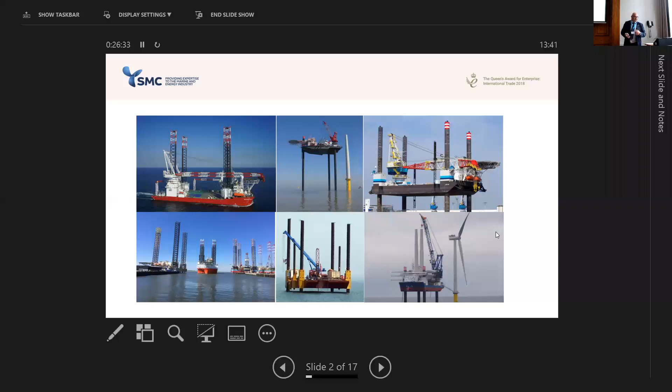So the way the presentation is laid out, the supplement question is asked at the top. And then what we're doing is basically giving a range of answers and a range of questions that you may or may not ask or think about when you're doing a vessel. So for those of you who've never done a jack-up vessel and might have aspirations of wanting to get into that market through supervision and increasing your capabilities, this might be useful. For those of you who've got accreditation, you'll probably tell me I'm wrong at the end, but okay.

Right, okay, so first question, and they are laid out in the same order as what there is in the supplement, so yeah, off we go. So is a vessel operating within a specific trading area or limiting distance from a safe haven as prescribed by the flag state? So what are we looking for there? In essence, we're looking at certification. Okay, it's realistically, it's a fairly standard question.

One question about, which I'm going to throw out to you is, what is a CMID or an MWS? What type of inspection is it? It's an audit. Yeah, it's an IMCA, yeah. It's a snapshot. Safety. You're all right in one way, but you're all wrong in another. Is it a pre-hire? Is it suitability? Could that question be deemed as a type of suitability question?

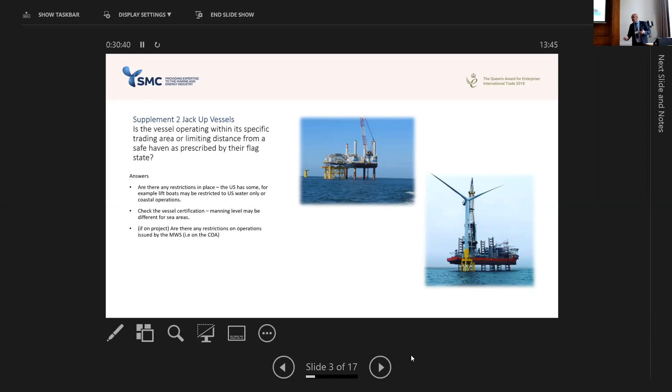So, MODU, okay? Can a vessel be two different types of entity? Simple answer is with a jackup vessel, yes it can. Because most jackup vessels will have a vessel certificate to say that it is a, if I use an example of say the Seajacks Zaratan, Scylla, any of the self-propelled, they will be a standard vessel. But then they can also be a MODU.

So when they change from being a vessel to a MODU, do they need a vessel master? Technically, on some of the vessels, no, they don't. They can actually de-man down to something like a crew of about 4 under the minimum safe manning, as opposed to when they drop back into the water, they may need a crew of 20. So again, it's when is a vessel not a vessel? And that's realistically, when is it a MODU, when is it not a MODU?

But again, the question is asking, does the vessel have a MODU certificate? So again, it's a simple yes or no. But what you're looking at is the criteria behind it, and is there anything there that needs to be addressed, needs to be picked up on? Have a good look at the certificate. Again, looking at any restrictions that it might have. There will be listings of restrictions which reflect on safety, and that can come back to, again, what its survival heights are. Survival heights can be determined depending on different sea areas, different projects.

I know I've got a couple of marine warranty surveyors in the room here. So if I'm correct, Lisa,

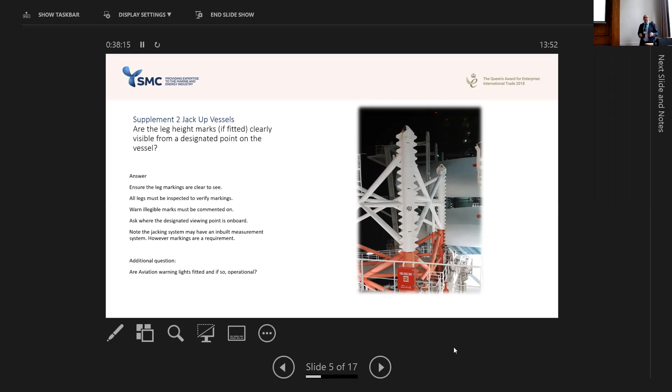The other thing as well with jack-ups which have particularly long legs, you're also looking for aviation lights as well. That can come into the additional supplement section. If one, and you ask them to put the aviation lights on, there's one not working, that would be something you would put into point 14 of this supplement, which would be an additional finding to it.

Okay, this is a bit of an odd question, and fortunately in our office I have a very good guy who was master of a jack-up for 5 years, one of the big ones, and he always said when he was asked this question, it's slightly odd because it's more based around some of the older types of jack-ups to what they used to have with inclinometers and things.

So how the calibration certificates and that are done, it may be one that you come across if you were doing it that you get as an observation finding, and it has to be given more investigation by the vessel operator. Because what a lot of the vessels have, they have calibrated systems which are digitally calibrated within the actual jacking control components, rather than just on an actual inclinometer, which is in place on how that is calibrated. Because are they calibrated?

They probably were calibrated at day one, but are they regularly calibrated? From his own experience, he said no. Basically, they've probably moved around the ship as well. So it's not a trick question, because there are no trick questions within the CMID. It's one you may not find a simple answer to, so it may create an observation that's later rejected by the vessel operator or master depending on how it's explained.

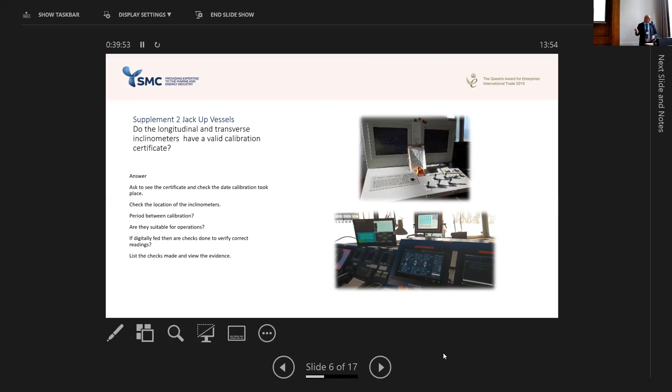Next question: have jacking engineers received formal training in jackup operations, including fundamentals of jackups of soil conditions? Anybody been on a jacking engineers course? Nope. Anybody heard of a jacking engineers course? Yep. Okay, may I ask where the course was or who it was run by? Julian Osborne. Which company? Oh, okay, an in-house course.

Jackup courses, there are not many. LOC have run one kind of traditionally for quite some years, but there aren't many because there are so many different jacking systems, and a lot of them may only be on one or two types of vessels. So really the question becomes, have you had training on this specific system, and what level of training? A lot of it may be in-house training, or training from the actual jackup manufacturer, the systems manufacturer, and then it's how you interpret the soil conditions.

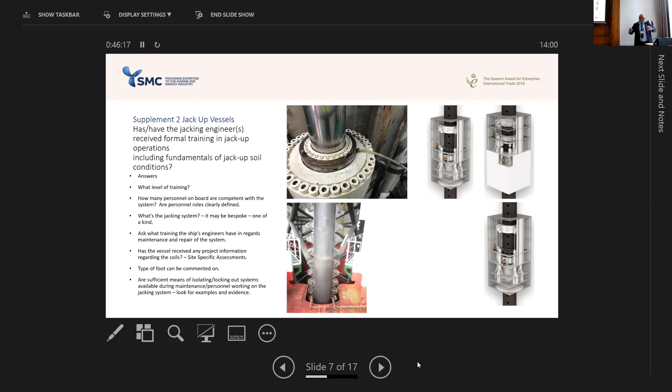Is everybody getting quite hot in here? Have we got some windows open? I don't want people doing an Angela Merkel on us and starting shaking. Just to show I'm current, that's all. If anybody didn't follow that, Angela Merkel nearly passed out yesterday because of dehydration at some event she was at. She was stood shaking, so I didn't want to see anybody starting to do that. Okay.

So, next question: does the vessel's operating manual cover generic procedures for refloating, towing, self-propulsion, dynamic positioning, preloading, elevated operations applicable to routine operations of a jackup?

Right, big question. Procedures manual - that's what we're looking into. When you go to do an inspection, how many times have you been given a big box of manuals and told to go read it yourself?

I don't need to know how it works because I'm not going to use it. What I want to know is, do the crew know how it works? So when they give me the manual, I normally give it back and say, you tell me. Then I can take the manual and reference back to see if what they're telling me is what they're actually doing. So it's question, answer, listen to what they're telling you, then cross-reference to what is written.

That's what this question is basically all about - understanding that the crew understand what the procedures are. There's quite a range of things there, and for those of you who do DP, most modern vessels have DP, and what they go through is a changeover.

So you go from being pinned, legs down on the seabed, to floating. You go through a stage when jacking down where it gets a bit bumpy because the hull is still in the water and having an uplift effect. That stage is quite critical and very weather critical, because a lot of vessels can't operate much more than about 2 meters HS.

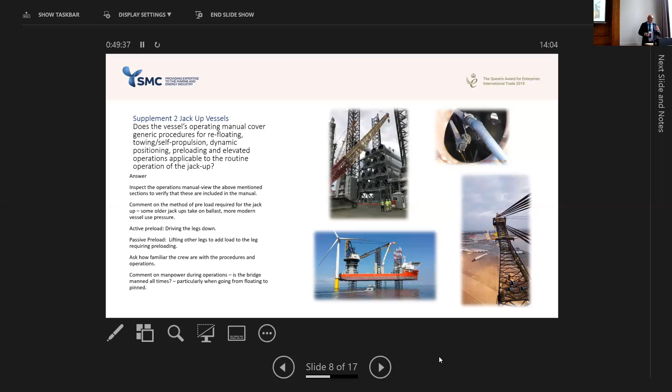So weather does become an issue over that, and that goes through the preload side as well. So it's about getting that information out of the crew, making sure they understand what they're talking about. It really is a listening question - again, cross-referencing to what has been documented.

Okay, procedures. Does the jacking system manual cover safe operations and maintenance? Again, it's kind of a standard question for any vessel, but this is just bespoke to an actual jacking system.

There was talk a few years ago when more vessels were coming out into the renewable market that they would start to do an FMEA on jacking systems. I think I saw one which had been put together in a kind of loose situation, but it hasn't, or not that I'm aware of, really followed suit because of the criticality of it.

In essence, the early jacking systems and vessels on jack-up rigs would probably only jack once, twice a year, maybe 3 times at best. You've now got a vessel which is jacking probably 5 or 6 times up and down a week. So the wear on the components becomes massively increased.

As an example, when we were on the 3-legged thing, which was a real disaster, it resides somewhere in West Africa as far as I believe now. When we looked at the planned maintenance system for it, there was one particular item which said, in 6 months, change it. Everything was time-based, most of it was within a month or 2 months, but everything was time-based and not usage-based.

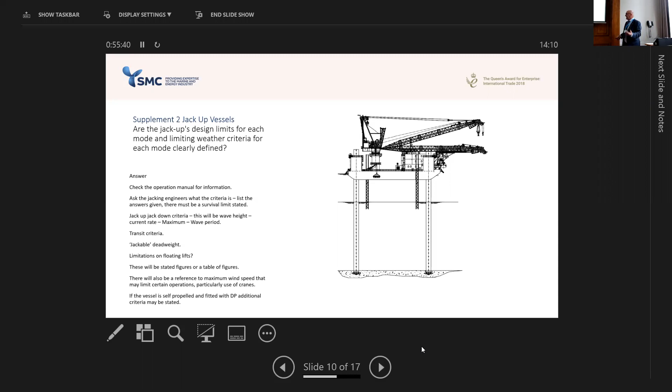When it goes slightly wrong, or very wrong, during loadouts, have the appropriate stability criteria been completed.

The stability criteria, you come into two different areas because you go from a vessel on a lot of them to a static platform on others. So you've got different types of stability criteria which come in. And marine warranty always comes into a big part of this, to what criteria they're actually allowing.

So there may be some cross-checking of that when you do this type of inspection. You're looking at what the records are, historical records, to see if there's been any issues raised. Are the records being completed? Who are they being completed by? What level of training have those people had? How competent are they? We get asked the question, competent person - how many competent people are there? Still ask the question, what is a competent person? Because you get different definitions of it.

If stability computers are being used, are they class approved stability computers, or is it somebody's Excel spreadsheet which they developed because they think it's great and amazing, but it hasn't been cross-checked with the actual stability book. So whatever they pump out might not be quite correct. I'm sure some of you have come across those before, or maybe even produced them.

Okay. So yeah, when it goes wrong, punch throughs. Anybody know what a punch through is? Nobody? Graham, you don't know what a punch through is? I can't believe that. Oh, right, okay then. I'm surprised Gert didn't tell us, but anyway.

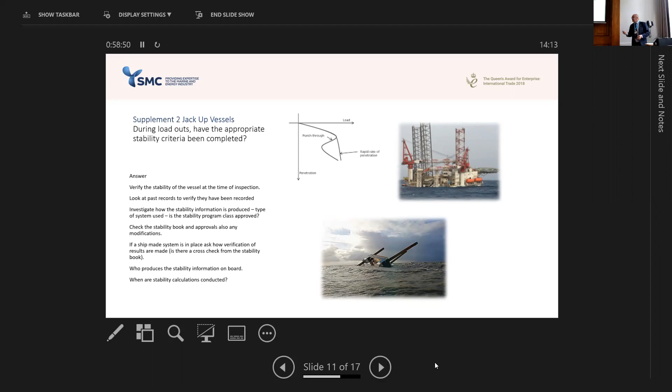I think this is from the East Anglia 1 wind farm, totally confidential, but Graham doesn't work for me anymore, so he's not going to tell me off. It's not really, it's just something we pulled off the internet.

And that in a design stage may mean that the jackup has to have different feet attached to it, and that is basically in size. It might have a different sharper pin to the bottom, maybe different weights, different things around it like that.

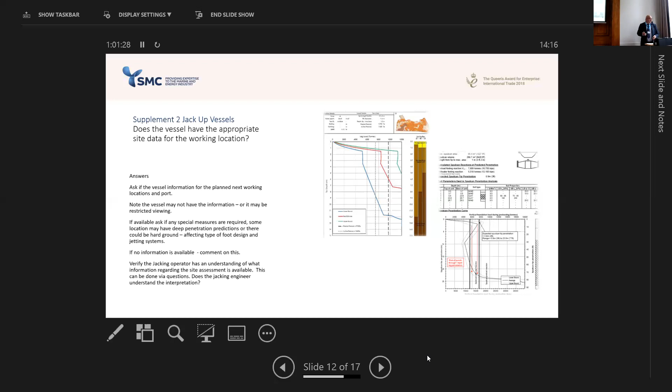Does the vessel have a comprehensive lifting manual? In essence, this question is answered earlier on in the CMID in question 16, because it's the same things effectively. Does it have a lifting procedures manual? Yes, if it has it in 16, it certainly has it in this part here as well. Although this goes into it in a little bit more depth, because you are now specifying on the big cranes, the type of crane it is, whether it's a pedestal mounted crane on the deck or a wraparound leg crane, level of training, types of checks which are done. Again, all these things need to be looked at and investigated so you can evaluate the correct answer for it and deliberate whether there is a finding appropriate to it.

Periodic inspections, that's a really big one because the usage of the physical cranes on these vessels is significant. They are always in use. So what level of inspection is done? Most of them will go through daily checks. And if they don't, you should be asking the question, why not?

That's for sure. How are we doing for time, Mike? Am I? Okay, I don't know where I've got to go. I'm lost.

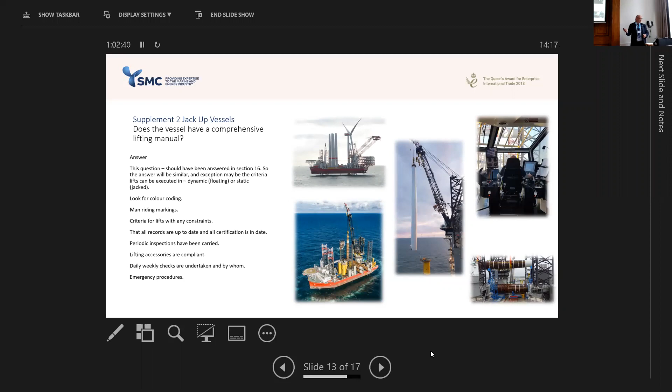All right, okay, I'll be quick. Does the vessel have personnel transfer? Personnel transfer, there's various ways of doing it. Helicopters is an obvious one, fairly standard helideck procedures. It may have procedures around that and certain guidance that the vessel cannot have its crane up, or it has to have its crane in a different orientation to give the helicopter right to land.

Man riding, it's still done. Not much in the North Sea, but it's still done certainly in other parts of the world in different types of man baskets. I'm sure most of you have seen horror stories or things on YouTube where people are swinging about and then they get dipped in the water or they fall off and things. I've done a few of them, and I must admit, I don't particularly like them.

We also have the frog. Anybody been in a frog? Yeah, it's quite interesting being in a frog. You're actually locked into it, and if it goes wrong, it's supposed to be safe. Okay.

So different types of transfer systems. The main thing is, what's the procedures like? What's the standard of it? Do people know how to use it? What type of drills are done? Of course, when they've got helicopters, well, that's answered in your helicopter section as well. It's the same thing. The main one which you'll probably come across is going to be the boat transfers and how they're done.

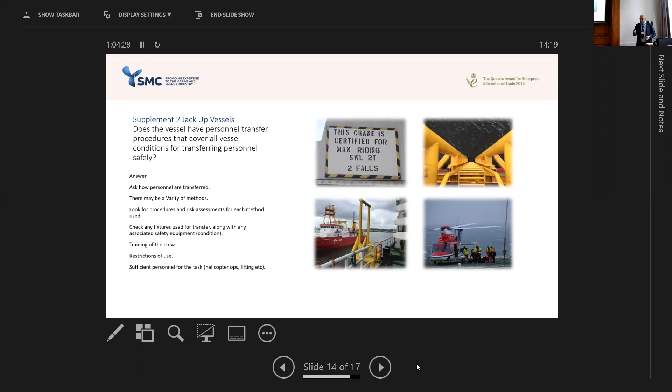Emergency procedures, again, that's answered literally in the earlier parts of the document. However, what we're looking at here are the specific procedures around if something goes wrong with the jacking system, if it goes wrong when there's a lift on the hook, is there an emergency slew which can be manually operated, and that's quite difficult to do on the big cranes. And again, on the jacking systems, how that can basically stabilize and get the rig back to a level position or as level as possibly can be. And when it becomes a point where they have to start to evacuate personnel, all those are triggers which have to be bespokely referenced into it.

If you look at the emerging markets which are coming up in the renewable sector, which Graham spoke about earlier, particularly in Taiwan, you've got a range of different things which have been kind of unique because jackups haven't been used down there before. Yes, they have in China, but not particularly close to that region. So you've got earthquake effects, you've got typhoon effects, and at the present moment neither have been hit by one, so we don't exactly know what the result will be. We hope we know, because we hope enough due diligence has been done and modelling has been done to assess it, but you are still looking for that level of detail within the emergency response procedure. Very important.

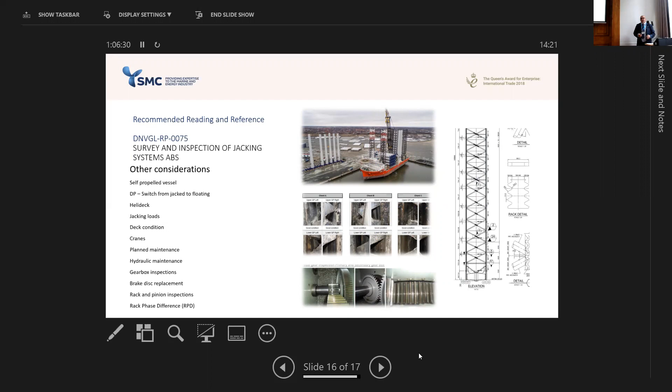Last slide, more or less, just a little bit of reference reading if anybody's interested in jackups. There's a reference there to a DNV document, and there's also quite an interesting one produced by ABS, again bespoke to it. But what you've got to consider if you're doing a jackup vessel, particularly one of these types used in the renewable sector, is that it has crossovers with many other things, and the biggest crossover is going to be DP. So it's how the DP interacts in the greater scheme of things, the heavy lifting side of it. So there is quite a unique set of challenges there.

Oh, questions. Oh, sugar. Anybody got a question they want to raise before we move on? Okay, let's go. There's always one question.

Very interesting presentation, thank you very much. A couple of things do spring to mind with what you presented. In my world, the operator's world, we have assurance and we have suitability. What you presented there, I wasn't sure what it was. It didn't really feel like it fitted with the health check and the management system piece. You were talking about COAs, you know, for penetration and punch through and the rest of it. We have a couple of jackups operating for me at the moment, Gorilla 7 and the rest, big ones.

Surely what we should be asking is, does the management system speak to that? And then let the suitability surveys pick up on the actual location approval? Because 9 times out of 10, when we look at these or get surveyors to go out and look at these jackups on our behalf, it could be 8 months prior to them coming. So what we're looking at is, does the management system speak to this? And then they can demonstrate that. And if we've got a historic demonstration of it over a couple of years, we can take cognizance of that to say that the chances of them not doing it on my location are very slim.